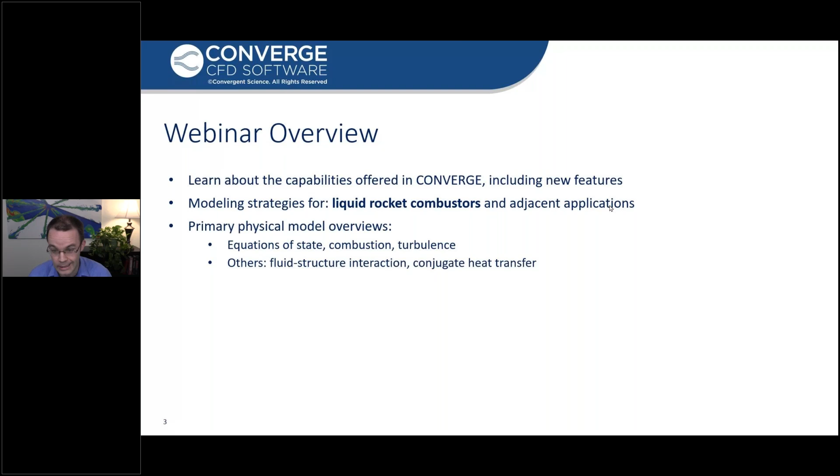In this approximately one hour webinar, we're going to talk about the capabilities offered by CONVERGE, specifically for the application aimed toward the end goal of modeling combustion in liquid rocket engines. We'll focus mostly on the effects of the equations of state, combustion, and turbulence, as well as highlighting the unique features offered by CONVERGE which make it a great fit for these challenging problems. Toward the end, we'll give a brief workflow demonstration of a multi-element combustor and show what's involved with a practical case setup, so you can get some idea of what it involves to use yourself. Then at the very end, we'll touch on a couple other related application areas briefly, but the bulk of the webinar will involve this end goal of what does it take to model liquid rocket combustors.

As a very brief intro for anybody who's not familiar, we'll go over the basics of a rocket engine so we can frame our discussion. In a rocket engine, the fuel and the oxidizer are stored entirely on board, so it carries with it all of the propellants. The fuel and oxidizer are then mixed and burned in a combustion chamber, and those combustion products are accelerated out through the nozzle to produce the thrust.

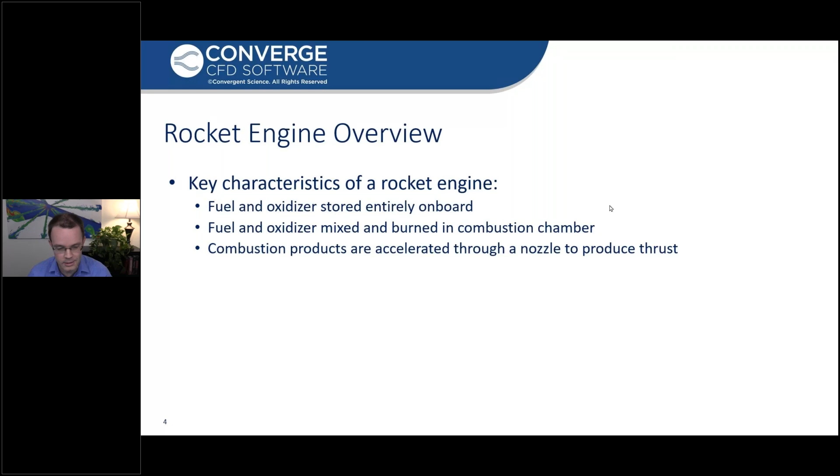That's the very basic purpose, and there's a basic classification of these rocket engines into two broad categories: the solid type of combustors, in which the fuel and oxidizer are in a premixed binder grain which is then burned, in contrast to a liquid rocket, which is the subject of today's discussion, where the fuel and the oxidizer are stored in liquid form and then pumped and injected into the combustion chamber, where they are subsequently mixed and burned.

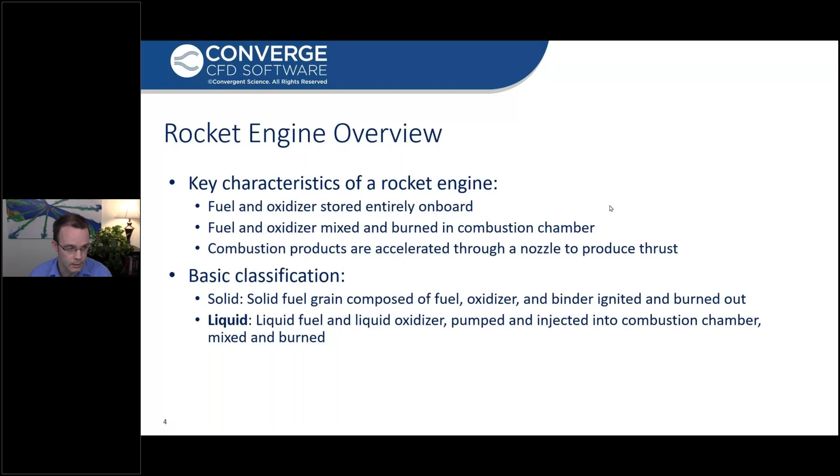Now, the key flow processes in rocket engines for which computational fluid dynamics analysis is useful include a variety of real problems, including the safe storage of the fuel and the oxidizer, the flow of the fuel and the oxidizer through all of the components, and then the ignition, combustion control, stabilization, and maximization of combustion efficiency, which is one of the main points we'll be looking at in this webinar.

For solid and hybrid type rockets, there's additional complexity involving the grain shape. For liquid rocket types, the fuel and oxidizer composition, flow rate, and all of the upstream flow dynamics are very important when considering the fluid dynamics type of modeling. And then lastly, although it's not a main objective of this particular webinar, of particular interest in the practical design are issues related to heat transfer, cooling of components, as well as nozzle flow.

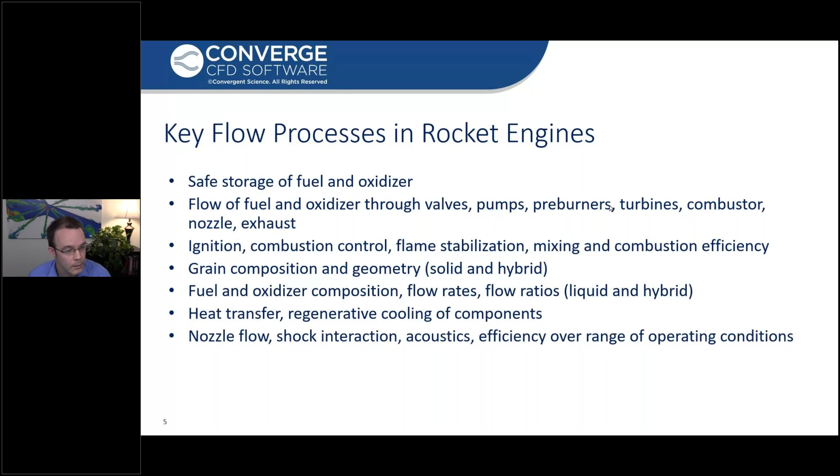To frame our discussion and the kind of environment we're going to be looking at in this webinar, I'd like to give everybody a sense of appreciation for how extreme the environment inside a liquid rocket combustor would be.

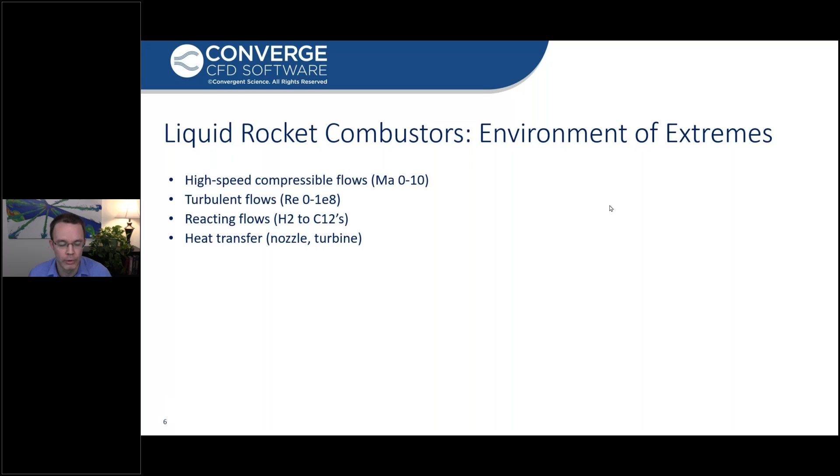These flows typically involve very high speeds at some point or another, with a large range in possible Mach numbers, as well as highly turbulent flows characterizing at least part of the domain with a very large range in Reynolds numbers. In terms of the reacting flows, the fuel and oxidizer combinations could involve tens to hundreds of species. A large range in heat transfer can be encountered in these environments.

But most importantly, and the major focus of today's discussion, is the wide range of the phase space accessed in this type of environment. We'll start on the injection side, where the fuel and/or oxidizer may be in the form of very low temperature cryogens, anywhere between 20 to 100 Kelvin, whereas the products of combustion can yield extremely high temperatures, characteristic of combustion or equilibrium compositions. Looking at the pressure, we have a similarly extreme range, going from near vacuum at the exhaust to extremely high pressures near the injection and in the combustion chamber itself.

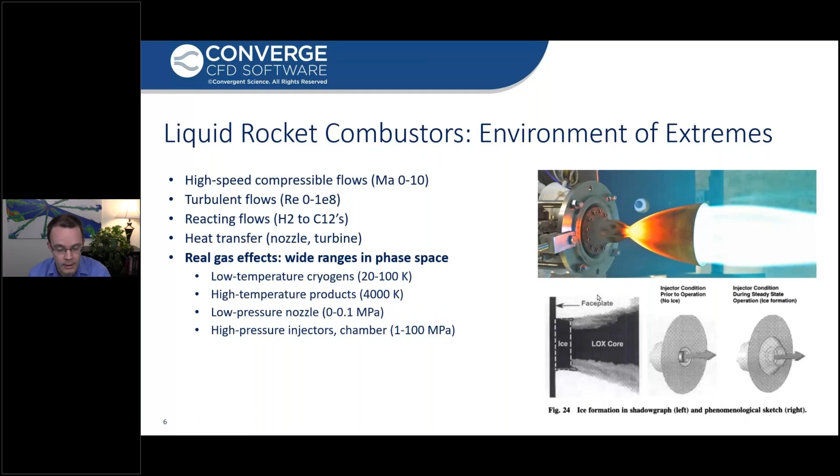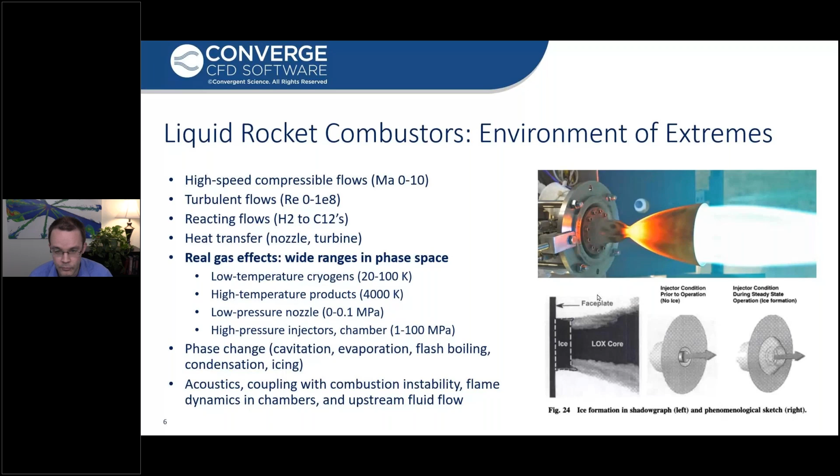So a really interesting contrast is to take a look at the extreme temperatures we have at the throat or within the combustion chamber, in contrast to the temperatures near the injection site, which are so low that ice may form. This is very characteristic of the type of problem where we want to demonstrate our different solution approaches, and help users understand what kind of advantages Converge can offer for these extreme environments.

Now we have a very brief value statement on why Converge is a great fit for these applications. Although Converge has a large number of amazing features, three are really highlighted in this application area. The first is no user meshing—the ability to bring in any geometry of arbitrary complexity and have it easily run through a flow analysis, which is extremely useful when the practical devices we're dealing with often involve very complex geometries that are strongly related to the dynamics of the flow.

Secondly, the automated and adaptive meshing approach is key for modeling these cases with enough accuracy to resolve all the important length and time scales, but enough efficiency so you're not wasting cost where it doesn't impact your end outputs as much. This is one of the unique features offered by Converge, and extremely advantageous for environments with very large gradients through space and large variations in time.

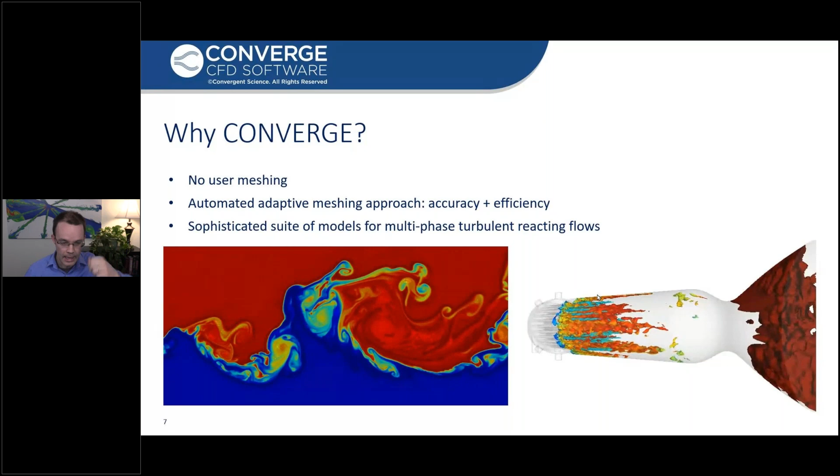Converge will take care of all of this for you with a really accurate and efficient mesh, which is easy to set up. Lastly, and what will be the focus of most of our talk today, is the sophisticated suite of models offered by Converge, relevant to this broad category of multi-phase turbulent reacting flows—that's what we're going to be discussing mostly today.

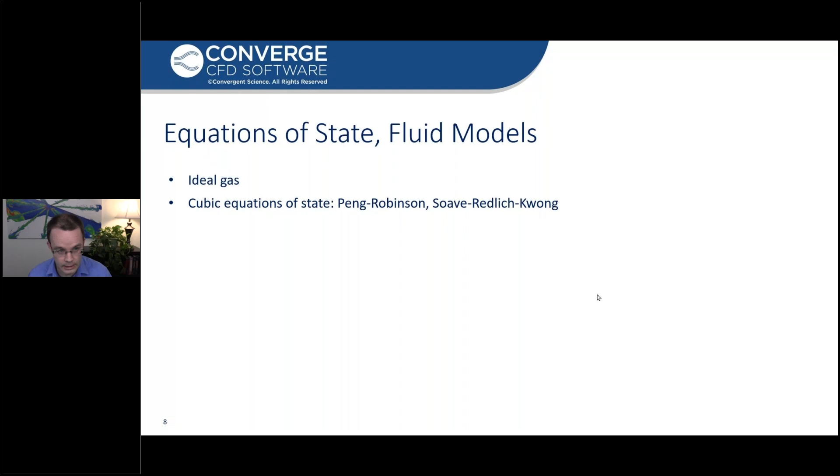A brief overview of what type of equations of state or other fluid models are offered by Converge is what we'll go over next. At the very basic level, we do offer ideal gas equations of state, which for some combustion models or combustors could be a very efficient approach. It's by far the least expensive, and with temperatures as high as they are, especially for lower pressures, ideal gas may be a good solution for some practical combustors.

On the other hand, the next level of complexity offered by Converge is in the category of cubic equations of state—for example, the Peng-Robinson or Soave-Redlich-Kwong equations of state. An alternate option offered by Converge is the tabulated equation of state, which has three flavors: one being the single-component tabulated equation of state, a fairly simple two-dimensional table generated in a pre-processing step, so you don't need to worry about how expensive the equation of state is to evaluate. Then there are two additional options for cases involving multiple components and mixing—one using ideal mixing rules, and another including an additional tabulated dimension to account for more accurate mixing properties. We'll talk about these options later in the slide.

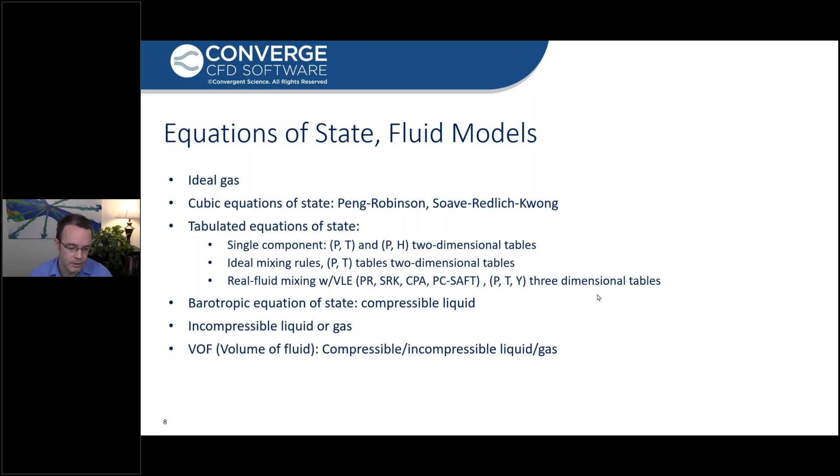As far as modeling multiphase flows goes, in addition to the detailed equations of state, Converge offers volume of fluid approaches, which can be coupled with compressible or incompressible models of the fluid. Lastly, there's a wide suite of Lagrangian spray models offered by Converge, the most complicated of which can be coupled with your continuous phase model through ELSA.

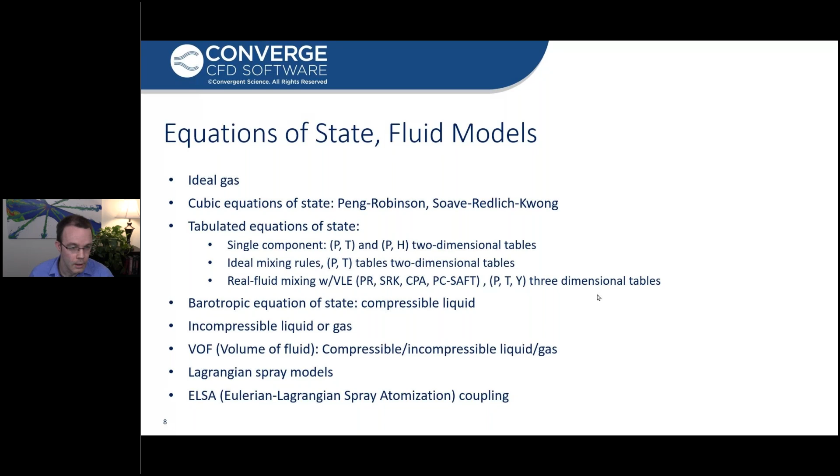CONVERGE also offers a very wide range of combustion models, although the main focus of this talk is going to highlight detailed chemistry, which we call SAGE. This is a great model because it's applicable across all modes of combustion. It's very accurate and easy for users to set up, and with our adaptive zoning, it's actually pretty affordable too.

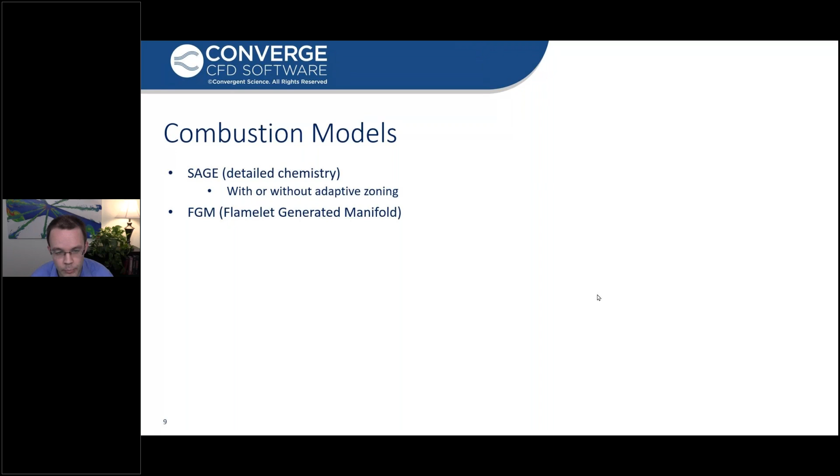On the other hand, we do have a wide variety of simplified models which are applicable to select modes of combustion, including FGM and RIF for flamelet-based non-premixed combustion models, ECFM3Z, applicable to some premixed and non-premixed cases, as well as eddy dissipation model for mixing timescale type of problems, and G equation primarily for premixed combustion problems. There's also a suite of submodels applicable to most of these combustion models, including models for NOx, which may be important for modeling practical combustors.

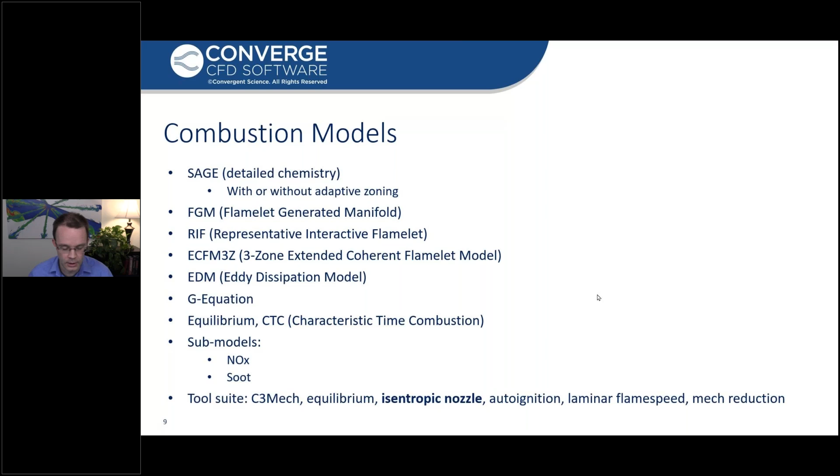In addition to all of these CFD combustion models, CONVERGE also offers a variety of tools for simplified combustion analyses, one of which is the isentropic nozzle calculator, which is really useful for these applications in order to get a good initial condition.

In the category of turbulence models, CONVERGE offers three main types, first of which is RANS, Reynolds Average Navier-Stokes equations, and there's a wide variety of those models offered here.

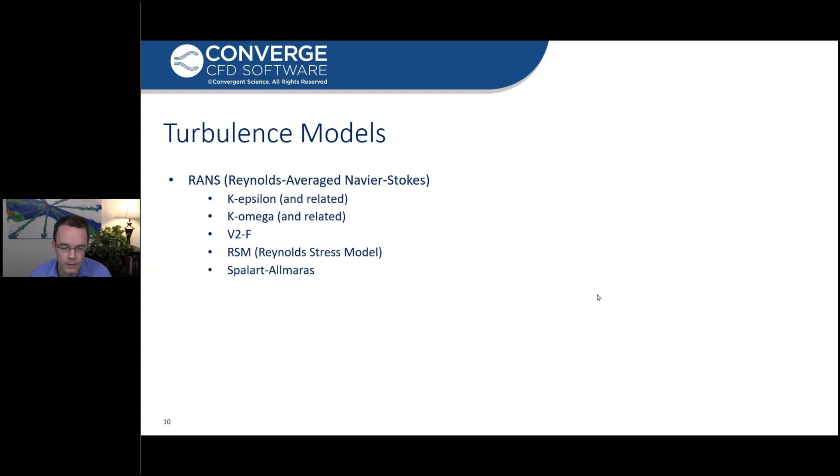The large eddy simulation is a great offering by CONVERGE, which is particularly useful for these combustion analyses where we're looking at unsteady effects and instability prediction. And then finally, the detached eddy simulation offers a combination of the RANS model for accuracy near the wall and large eddy simulation in the far field.

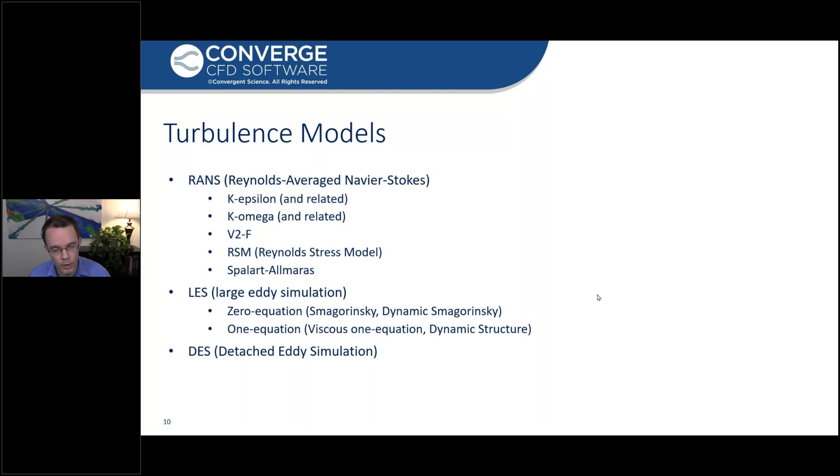So all of these models are offered by CONVERGE, and we'll demonstrate mostly the large eddy simulation and some RANS models in the context of the combustors that we'll look at.

Now, while the main end goal of the benchmarks that we'll show today are aimed toward modeling liquid rocket combustion, in this webinar we're going to take you step by step through three layers of complexity, all of which are prerequisites to being able to model multi-species, turbulent combustion problems across a wide range of phase space.

So we're going to go through in this webinar, this slide kind of highlights the main overview of what we're going to be looking at, a progression of demonstration cases starting from the simplest and moving toward the complex. In the very first one, we'll demonstrate the use of CONVERGE for modeling supercritical flows of single components.

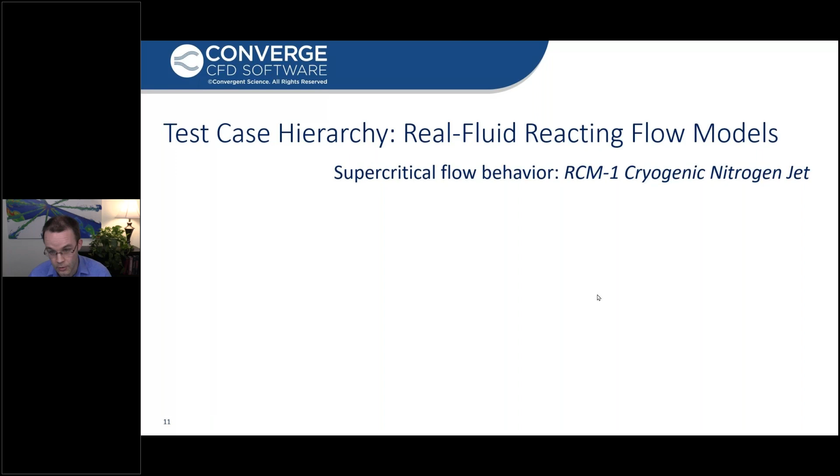After that, we'll go to our next layer of complexity where we talk about mixing dynamics at supercritical conditions for more than one component.

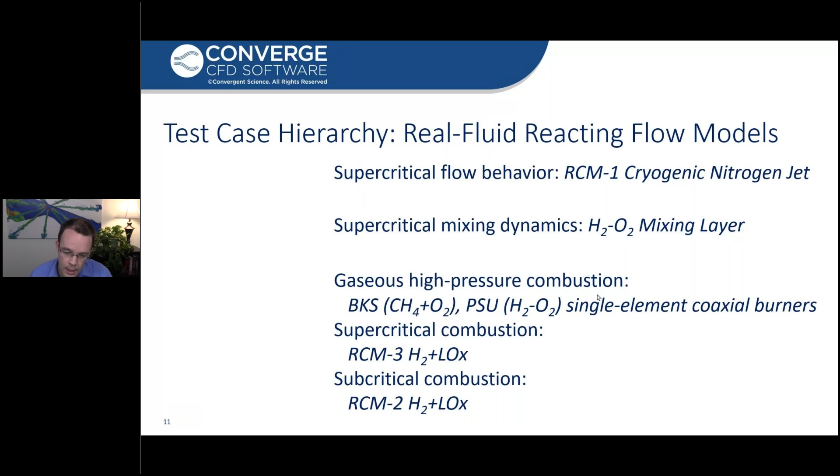And finally, after we've demonstrated the features and the model setups necessary to do these previous two problems, we'll talk about adding combustion into the mix, first with ideal gas type conditions or conditions that don't involve such low temperatures, and then talk about the supercritical and subcritical combustion type of models available through CONVERGE.

So just about all of these cases involve super or subcritical flows, so we have a wide range in the accessed phase space. The last four all involve mixing, and the final three involve combustion. So this is our progression, and this is kind of the roadmap for this webinar, showing what steps we'll take to reach this end goal of modeling multi-phase, multi-component reacting mixtures with CONVERGE.

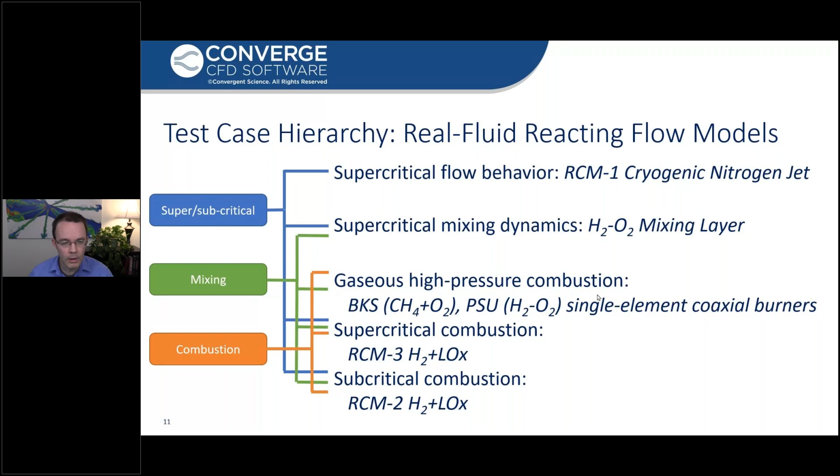All right, and we'll get started with that right away by looking at our very first category of cases, the simplest ones that we'll look at today, where we look at the use of CONVERGE in modeling supercritical flow and subcritical flow of single components.

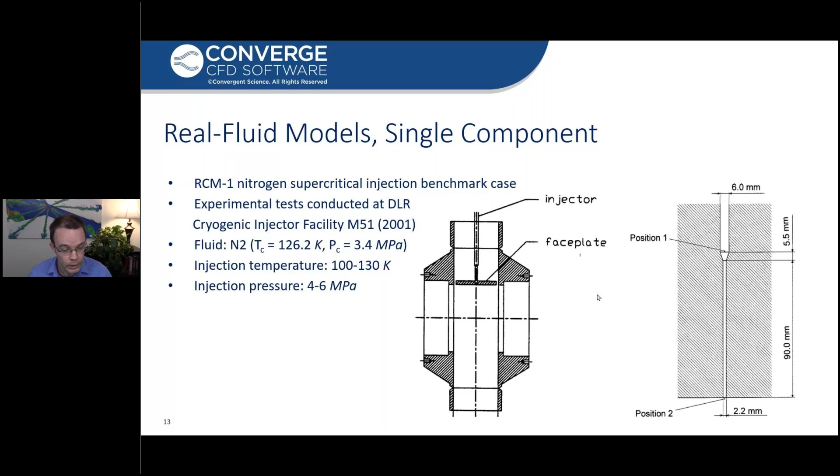There's a variety of test cases that we use to assess CONVERGE's capabilities in this area, one of them being the well-studied RCM1 cryogenic nitrogen injection case. This case involves a single cylindrical injection of low temperature nitrogen, and it's particularly designed to mimic conditions encountered in liquid rocket combustors. The environment pressure that's being injected into ranges between 4 to 6 megapascal, which is just over the critical pressure of the nitrogen.

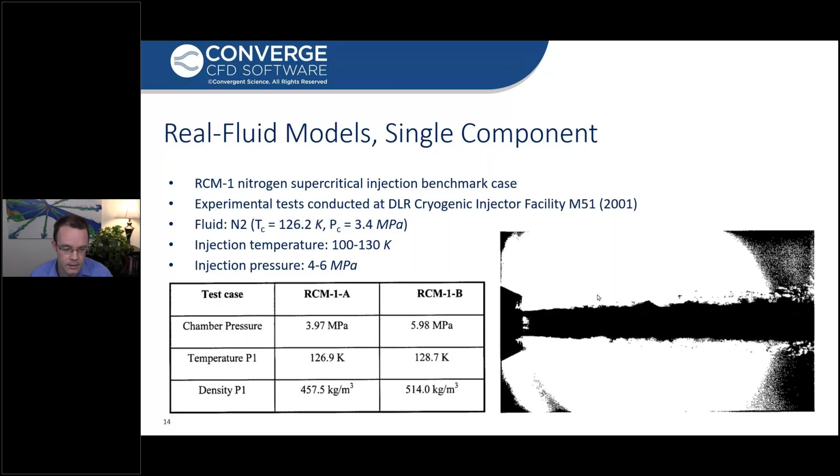Similarly, a lot of the thermodynamic variables have very strong change throughout the conditions encountered in this relatively simple test case. There are two primary approaches applicable in CONVERGE for this type of problem. The first being the analytical cubic equations of state.

In this particular model, something new added for CONVERGE 4 is the Chung correlation for the transport properties. We also offer a constant pressure tabulation, which can be used to specify the transport properties at a particular pressure or over a range of pressures. It's important to note that with this model, we still do require discrete tables for the departure functions.

One of the new capabilities offered by CONVERGE 4.0 is the ability for users to have fine-grained control over those resolutions so that we can get them fine enough to resolve these kinds of changes encountered throughout the conditions.

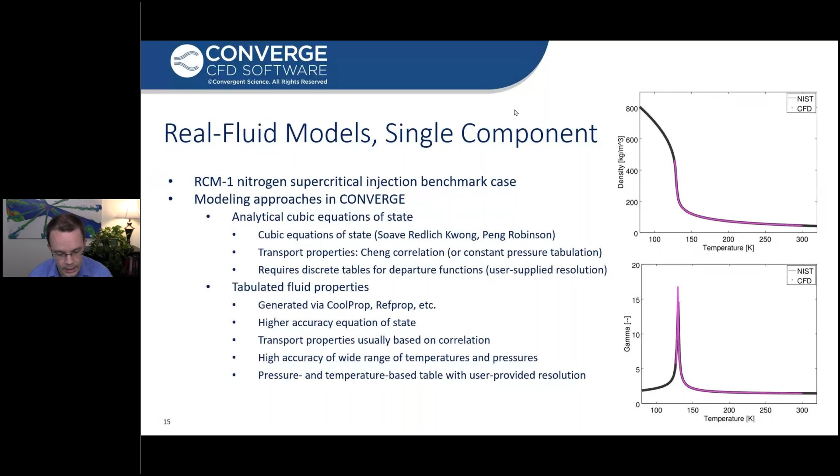Now, the second possible approach in CONVERGE is to use the tabulated fluid properties approach. In this approach, we generate a table ahead of time through another tool, for example the open source utility CoolProp, where we can use a higher accuracy equation of state and also retrieve the transport properties as well as the thermodynamic properties for these highly accurate and validated equations of state. Both of these approaches are available in CONVERGE.

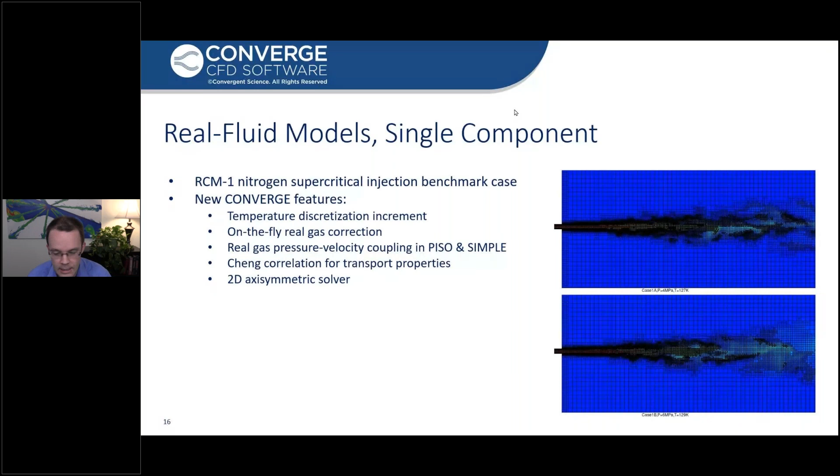One of the main capabilities offered by CONVERGE 4.0 is the real gas pressure velocity coupling. In this approach, we use the derivative expressions from the actual equations of state to solve our transport equations within each time step. This allows us to simulate over a wide range of changes in our density and thermal properties, no matter how they deviate from the ideal gas properties.

So like I mentioned, in addition to the RCM1 case, we have validated against a number of cases. When looking at the actual data for comparison, there's always some uncertainty due to the unknown actual temperature around injection. So while we do demonstrate results that look very similar to what's measured, that's not really the main point of this demonstration. The main point is rather that the solver runs robustly through this extreme range of conditions, including one of the cases from the AFRL injection case, which is slightly different from the RCM1 case.

In this case, it's even more challenging because the pressure is lower than what's encountered in the RCM1 case. So instead of 4 megapascal, the lowest pressure is about 3.5 megapascal, which is much closer to the critical pressure of the nitrogen. As you go lower and lower in pressure, the variation in the properties becomes larger and larger towards the critical point, and it's a better and better test case for the solver's robustness.

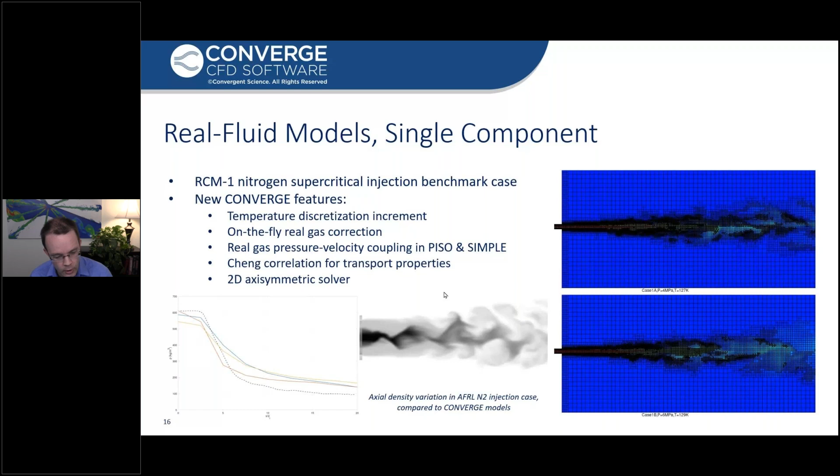So we've demonstrated the robust functionality of CONVERGE 4.0 across this very wide range in conditions.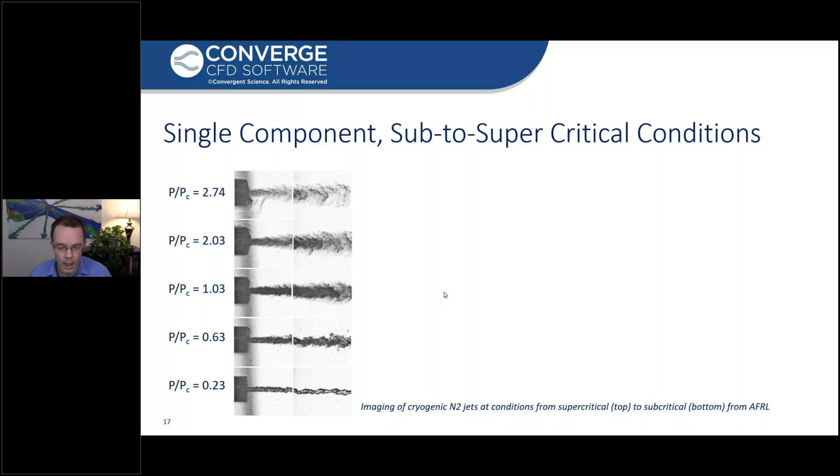Next you may be asking what happens as the pressure gets even lower than that. As the pressure reduces to beyond the critical pressure of that single component, we enter the subcritical regime where the injection dynamics could change significantly from the supercritical conditions.

For the subcritical injection, there are three primary options available with CONVERGE 4.0. The first being the volume of fluid method, which is pretty robustly tested out through a lot of different test cases. The disadvantage of the volume of fluid method is that the equation of state is somewhat simplified from the other approaches. In this case, we're limited to a compressible liquid model.

So we sacrifice some of the thermodynamic accuracy because of that. However, it's a relatively fast method, and a lot of times for your known conditions, it's quite a good approximation for that equation of state.

Now, the second approach is an enthalpy-based tabulated equation of state. With the enthalpy-based approach, instead of a pressure temperature table, we use a pressure enthalpy table. This has the advantage of being able to fully parameterize the phase space from subcritical to supercritical conditions, which gives us the option to include the two-phase region in the simulation.

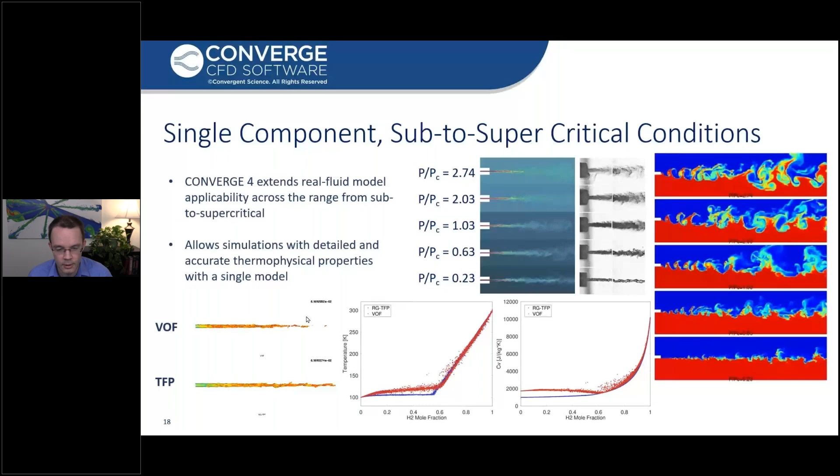So in terms of the model complexity and the cost, it's very similar, but as we'll discuss, each approach has certain advantages when we look at more complicated problems.

So here's another demonstration of the tabulated fluid properties versus the volume of fluid with a compressible liquid equation of state for a slightly different condition. This condition was chosen so that there's more error associated with the simplified equation of state for the VOF model.

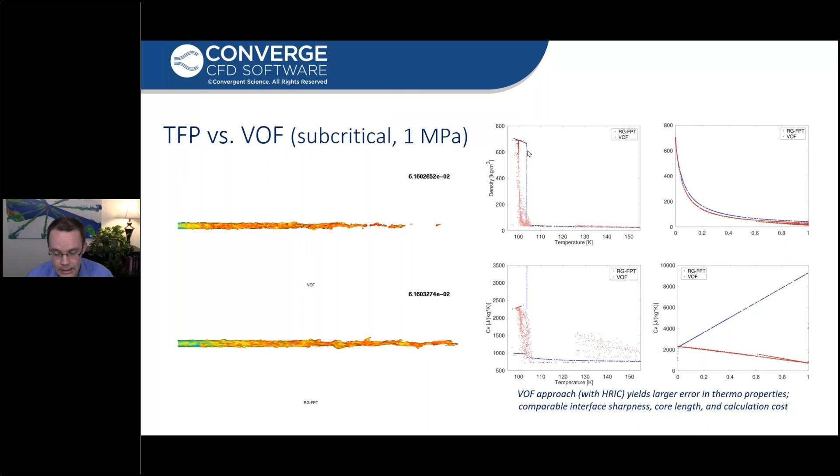In this demonstration, we showed the VOF model, in addition to the equation of state being different, has the ability to include the non-equilibrium effects in the phase change, which is why you see these density versus temperature profiles deviate, whereas the tabulated equation of state assumes equilibrium properties at all temperatures and pressures.

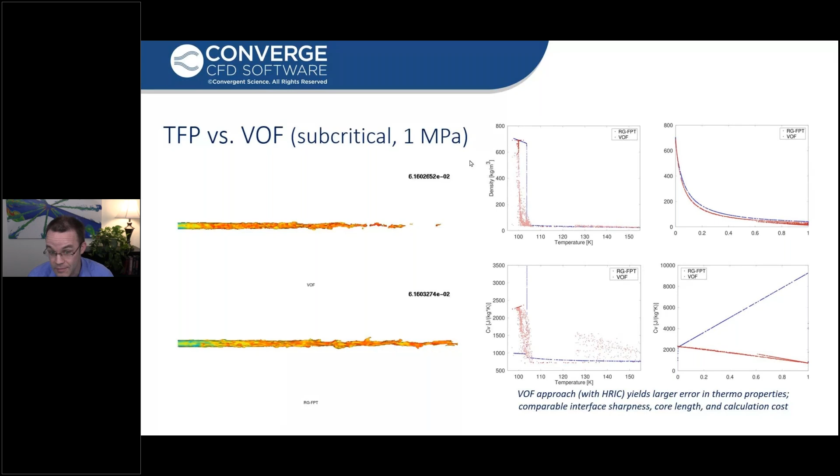The volume of fluid model does allow the timescale to affect the phase change rate, so you get some difference there. What we don't really know is which is more accurate: the non-equilibrium effects together with the simplified equation of state, or the more accurate equation of state with equilibrium phase change.

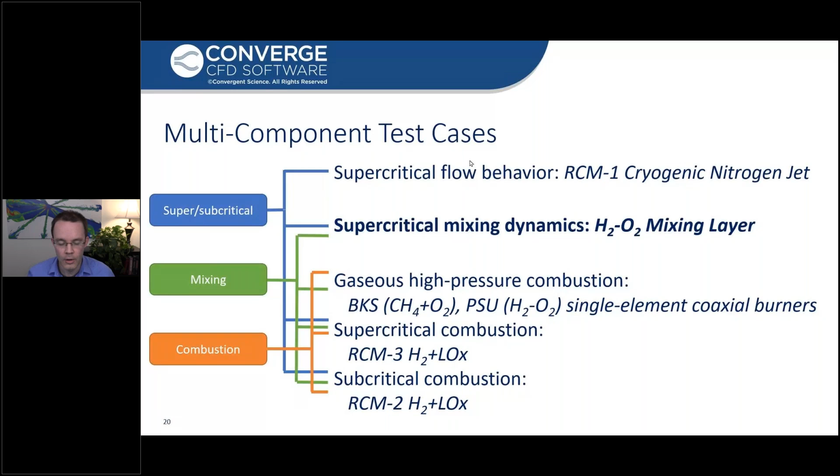Okay, so having looked at the single component test cases at both sub and supercritical conditions, we'll move on to the next layer of complexity, and this is in modeling the supercritical mixing dynamics. The main test case we'll use to demonstrate the features offered by CONVERGE is a hydrogen-oxygen mixing layer, although we will demonstrate the applicability in some other cases as well.

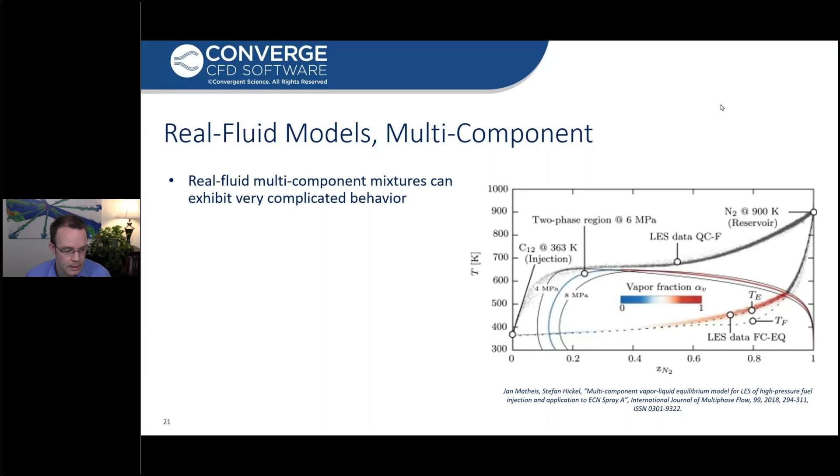And the very first thing I'd like to demonstrate, and hope that you get some appreciation for, is how complex the additional element of mixing can make the problem statement. So as soon as we introduce another component, we can have a possibly very wide range in properties and a very large deviation from the behavior of those single components.

In the case of a multi-component mixture, the thermodynamic state is parameterized by the pressure, the temperature, and the mass fractions. And the mixture properties, as this diagram from another work does a really great job to show, may be very different from the properties of the pure components.

For example, as shown in this picture, we have a mixture of dodecane and nitrogen, and although the pure components' critical points are exceeded in all of the pure stream conditions, the critical points of the mixture are extremely different, such that we get two-phase behavior in this type of mixture.

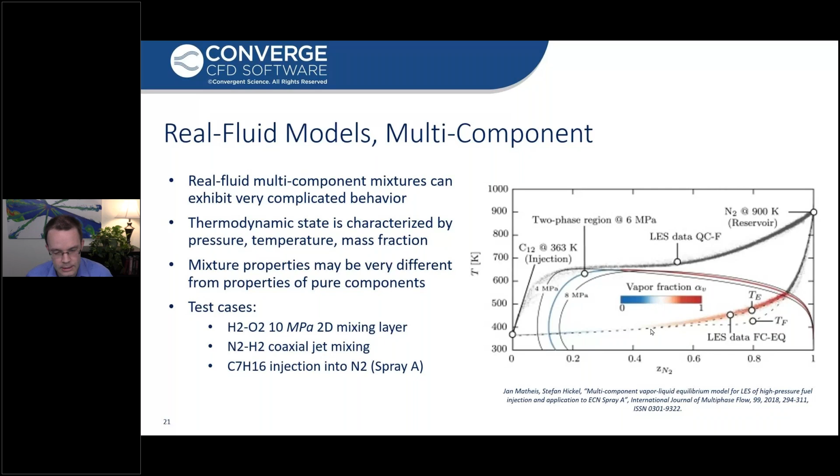And to demonstrate this, we'll use three different cases to show CONVERGE's different models applicable. The first being the 2D mixing layer of cryogenic oxygen and hydrogen. Then we'll also show a coaxial jet of nitrogen and hydrogen. And lastly, a diesel-like injection scenario modeled with the same approaches.

The first being the standard cubic equation of state, where we only look at the largest root, which is the common approach mostly used when the cubic equation of state is used. But that's contrasted to a more detailed approach, the same equation of state, but with a vapor-liquid equilibrium computed for all of the points which fall into the multiphase part of the phase space. This is demonstrated through the third option I mentioned for modeling mixing with a tabulated equation of state.

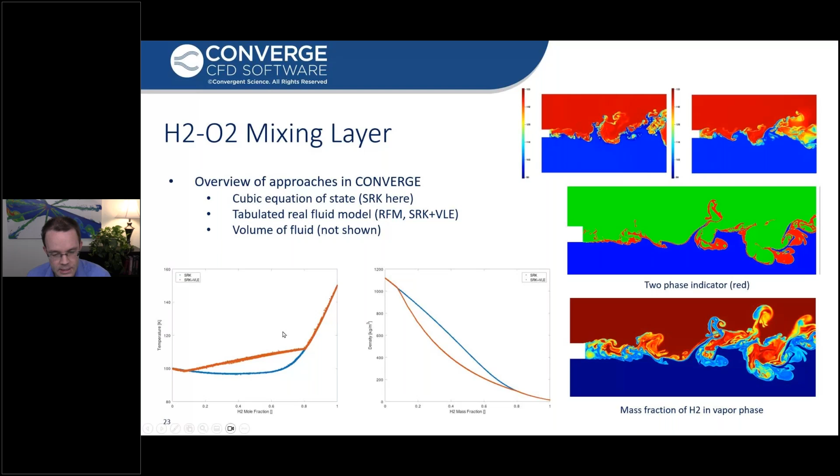complementary surface tension forces wherever the interface is present. Meanwhile, within each of the cells, the homogeneous approach is used, so any cell falling within the two-phase region has a homogeneous composition composed of the sum of the liquid and the vapor properties. This model also allows us to consider the differential effects of having component compositions change within the two-phase region, which is a capability that neither of these other approaches, the standard cubic equation of state or the volume of fluid approach, can offer. So for cases that are very sensitive to the mixture density and/or the mixture temperature, this is a really useful approach that is a great capability of CONVERGE 4.0.

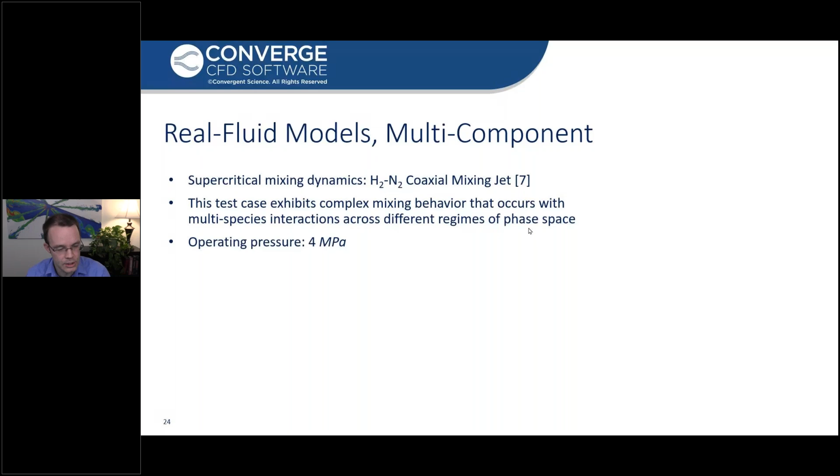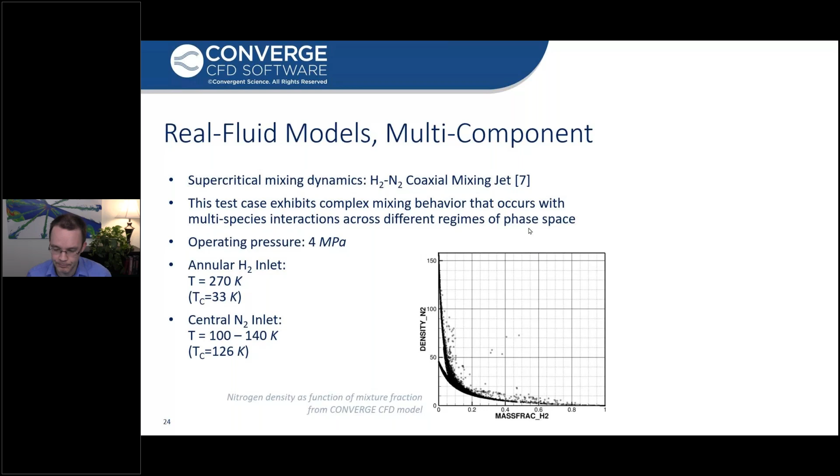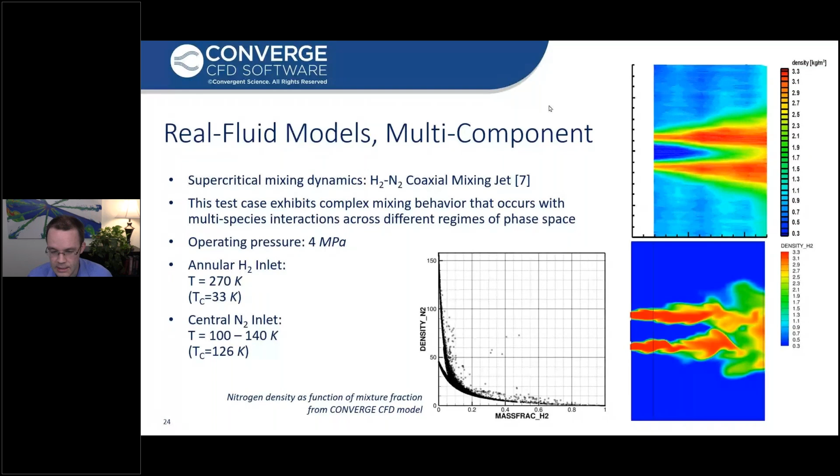A second test case to examine the multi-phase, multi-component mixing is the coaxial mixing jet of hydrogen and nitrogen, again at cryogenic conditions. There's an annular inlet of hydrogen which encloses a central inlet of cold nitrogen. These are injected into an environment slightly above the critical pressure of the nitrogen. In this case as well, we do get two-phase behavior, and the CONVERGE model is roughly compared to the density measured experimentally, but more importantly, showing the solver running robustly and with a thermodynamically consistent model across this wide range of the phase space.

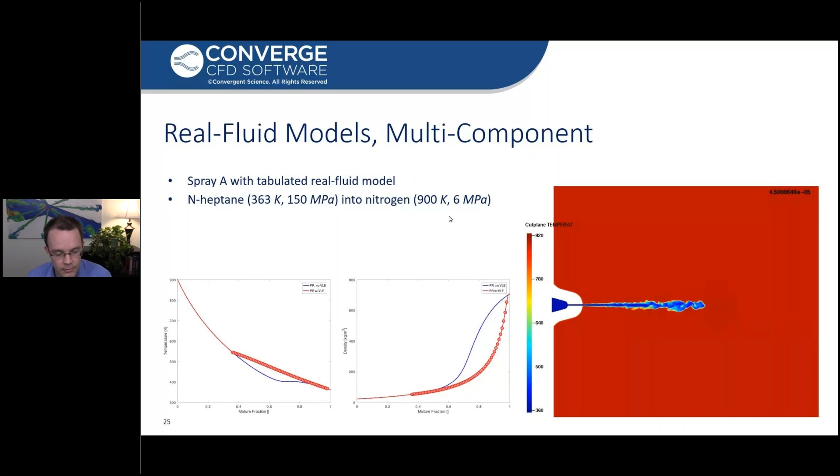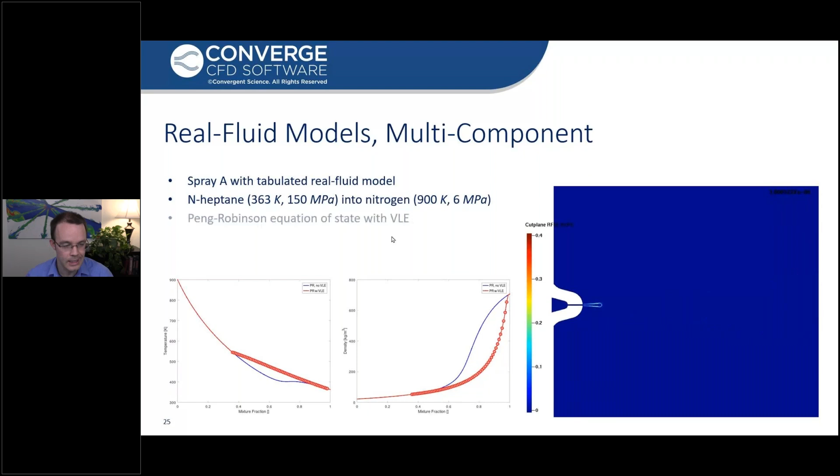Now, the last problem we'll demonstrate for the multi-phase, multi-component mixtures is a very different application, but with very similar conditions, namely the spray A conditions involving the injection of high pressure N-heptane into nitrogen. The purpose of doing this is to show that the conditions encountered within the liquid rocket combustors are similarly encountered in other applications, and the models being used here do a great job offering additional levels at which we can look at the model complexity.

So in this approach, we compared the standard Peng-Robinson equation of state with and without the vapor-liquid equilibrium calculation. You can see again here, by this plot showing the mixture temperature versus the mixture fraction, that we do have a considerable part of the mixing space occupying the two-phase region. This approach offered by CONVERGE, together with our collaborators at IFP, allows us to look in detail at that two-phase region and understand how the properties encountered there affect the end outputs that we're interested in.

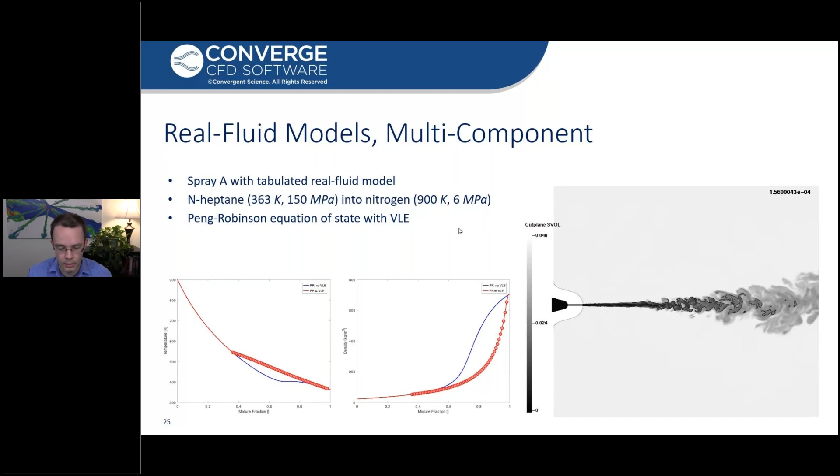If we compare the result here from two other simulations, we can see two main takeaways. One, that other simulations which consider the vapor liquid equilibrium part of the phase space give a really similar result in terms of the mixture temperature as a function of the mixture fraction, whereas models that don't consider this effect may have a much different scatter and phase space. In other words, the mixture temperature could be very different if the equation of state is different.

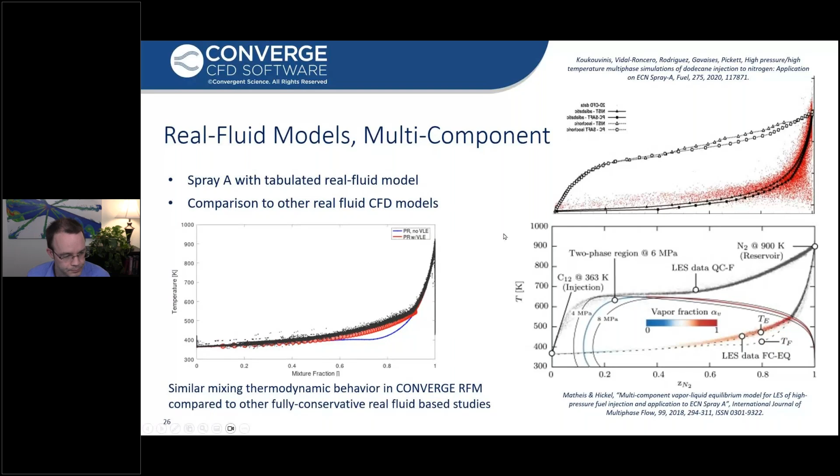Now, in addition to this, there are a couple other approaches offered by CONVERGE which can be really useful depending on your end goal. This demonstration shows the volume of fluid approach applied to a very similar problem. With this approach, although we've sacrificed some of the accuracy of the equation of state, if the end outputs we're interested in don't depend too much on that — for example, if we're more concerned about the acoustic propagation throughout the domain — then the volume of fluid approach offers a very computationally efficient and robust method for looking at those types of conditions.

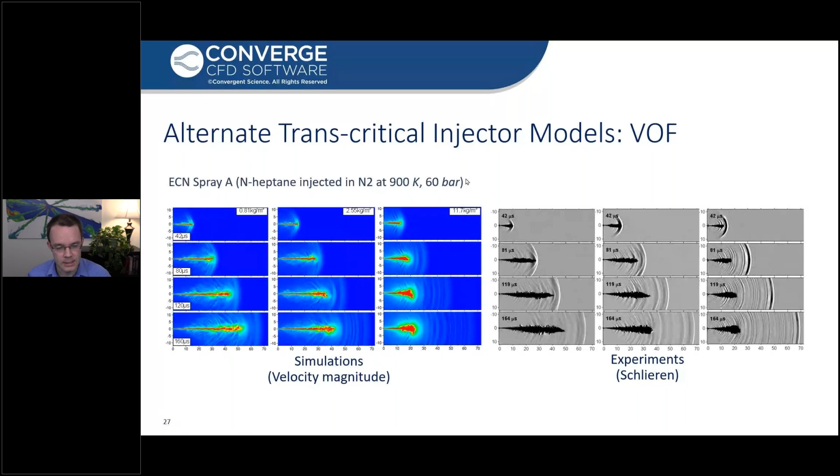On the other hand, incompressible models are also available in CONVERGE if users are more interested in looking for, especially for subcritical injection, the interface that occurs between the two phases. With the incompressible approach, we can get a much higher accuracy prediction of the interface, although again, here we've sacrificed even more of the equation of state by using an incompressible model.

So depending on the purpose of your studies and the conditions that you're working at, any of these three models may be of more interest to you.

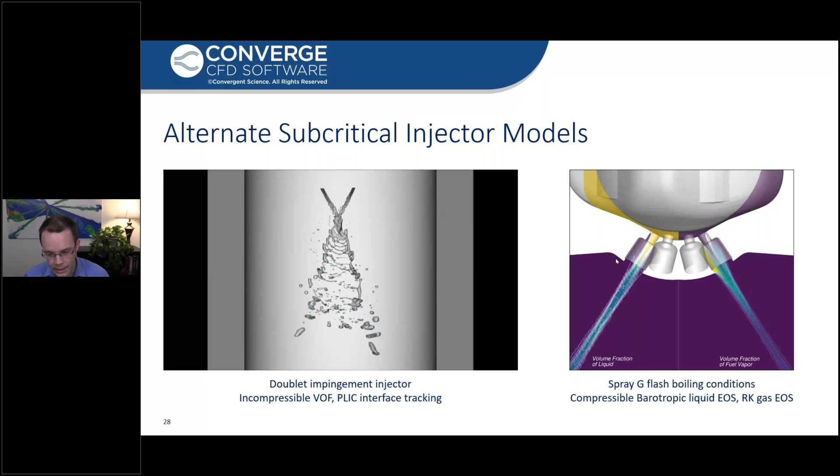On the other hand, if phase change is of high importance in your case, the volume of fluid method, as shown in this gasoline injection case, offers a lot of advantages in terms of being able to predict the non-equilibrium phase change in a very similar way to what we showed in the single component cases.

Okay, so now that we've looked at both the pure component behavior at sub and supercritical conditions, as well as the mixture behavior, we're ready to throw in the next layer of complexity into our models, that being the reaction element. So the next three types of cases we'll look at will involve the gaseous conditions, the supercritical conditions, and lastly, the subcritical conditions.

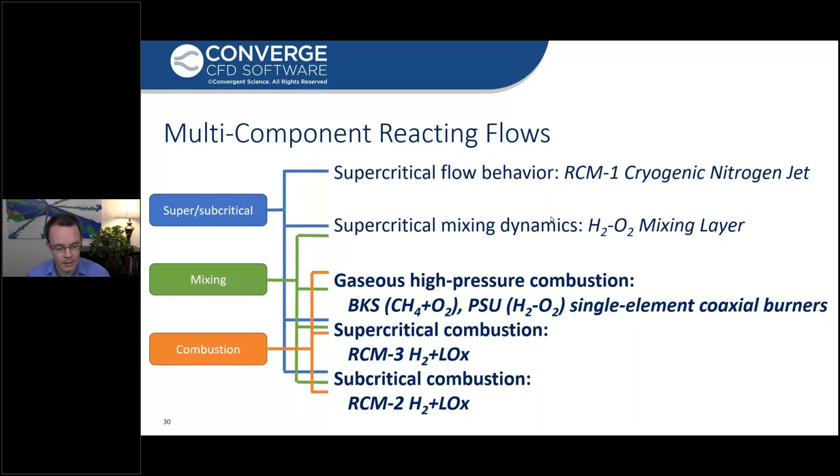This case shown over here is the Penn State combustor. Although it's at a high pressure of 5 megapascal, the real gas effects aren't as important here because the injected quantities are coming off a pre-burner. So they're elevated in temperature. They're not at the cryogenic type of state that we have in the other problems.

And in this problem, the main objective that we'd like to show is how to set up CONVERGE's mesh strategy and how to get a complicated case like this up to steady state in a reasonable amount of time.

In this case, we also have the complexity that the chamber pressure is a function of the flow through the nozzle. So we don't impose the chamber pressure, rather it's predicted by a combination of the flow properties at the exit as well as the overall combustion efficiency.

So the process we use is a three-step process involving a calculation without the nozzle and an imposed pressure based on equilibrium combustion. From that, we map that to a coarse grid using CONVERGE's mapping feature. And after that, we activate AMR to get a higher accuracy solution once all of those have reached a steady enough state. And with this kind of approach, we solve all of the other combustion-related problems that we'll show over here.

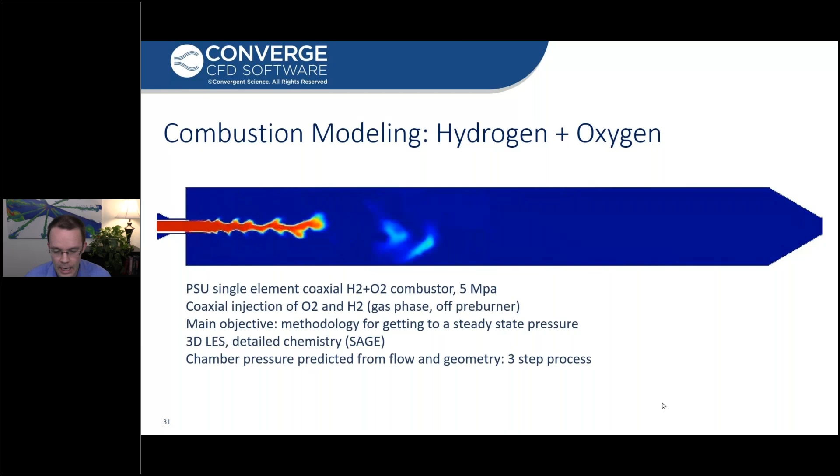So the main purpose of this case isn't so much to demonstrate the accuracy, although the chamber pressure reached is approximately that 5 megapascal, which is measured, but rather it's to show the approach in getting these complicated cases up to steady state in a reasonable amount of time.

Now, from this gaseous hydrogen case, we'll look at an additional layer of complexity, which is making the fuel composition more complicated. So we'll look at a methane oxygen case at a slightly lower pressure of 20 bar, but again with higher temperature inlets so that we don't have the complexity of the cold temperatures that we'll have in the next cases.

And the purpose of this test case is to show the advantages and disadvantages of the different combustion models offered by CONVERGE. And this is a great test case because unlike a lot of the others, it has a pretty large amount of optical data, important in understanding where the flame is located.

So like this picture shows on the bottom right, the OH concentration, which is a general indicator of where the flame is located, with the flamelet generated manifold solution, which is shown in the very bottom right. We get flames that are anchored closer to the post tip, whereas with SAGE, we get more of a lifted flame, which is also a function of the grid resolution around this part of the flow.

And it can be something that we can validate to the experimental data. So if we look to see where the flame is actually anchored according to the time averaged images, we get something that's kind of in between what we get from SAGE and FGM.

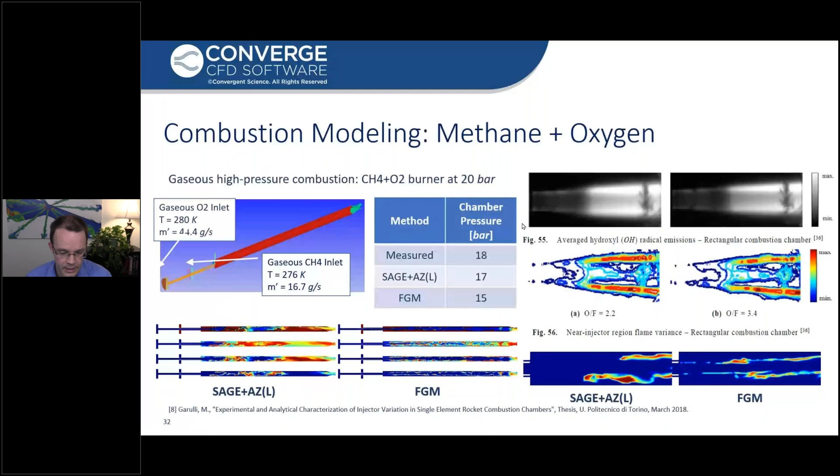And then a very similar approach has been used by one of our university collaborators at North Carolina State University, where they performed a similar analysis, but on a challenging flow configuration that involved the prediction of the acoustics within the chamber. And very interestingly, the compressibility from the model, as well as the interaction with the reaction rate, predicted a very good match in the internal acoustics of the combustion chamber.

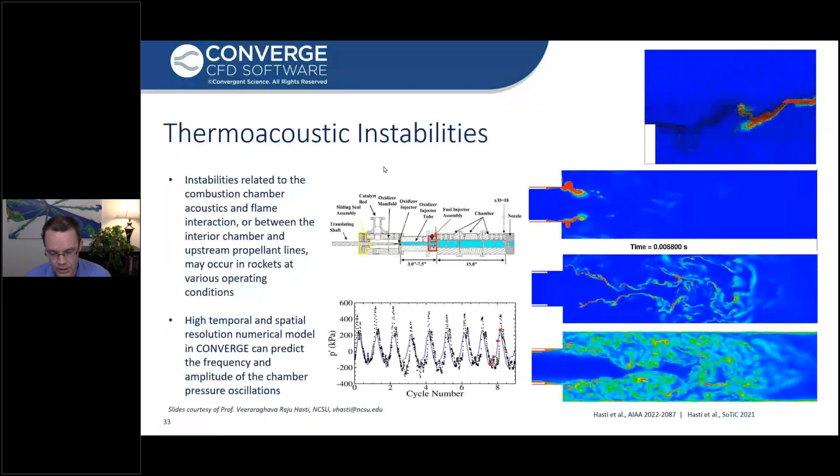So it's an application of a similar approach that was shown in the test case before, but for a test case that has more variation in pressure throughout the chamber and could be experimentally validated.

Now, the next layer of complexity to further add to these cases is the supercritical conditions where the fuel or the oxidizer come in at a low temperature. In these cases, we need to be a lot more conscious of our equation of state and other fluid models used in the study.

In this demonstration of the RCM3 case, where we have a chamber pressure of about 6 MPa and an oxygen injection temperature of around 85 Kelvin, we need to be much more accurate in our thermodynamics as well as our transport properties so that we have the right properties of our fuel coming in. The major thing to look at is the prediction of both the core length of our oxygen, which is in the center, as well as the flame shape.

For this particular test case, we looked at a couple different scenarios. The first ones, compared to another work, are done with CONVERGE's new two-dimensional axisymmetric solver for both a lower flow rate of hydrogen on the bottom, the C60 case, and a higher flow rate of hydrogen on top, the A60 case, contrasted to a full three-dimensional LES simulation of this particular case, shown on the bottom.

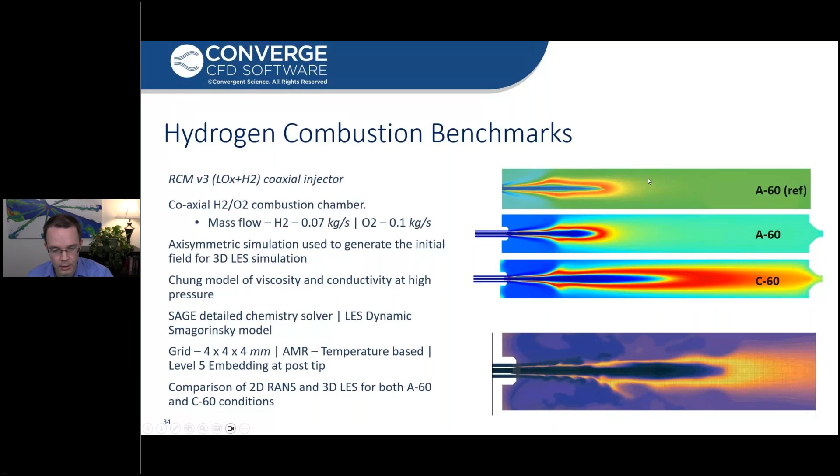So the 2D solution was used to initialize the full 3D case. Again, in all of these cases, the same approach used in that first combustion benchmark we showed was used to get the simulations up to a stable burning state in a relatively small amount of user time.

An additional case that can be contrasted to the RCM3 case is the NASA single element injection case. The nice thing about this one is twofold: first, that it looks at a wide range in the chamber pressure, spanning sub to supercritical conditions, as well as the fact that the chamber is relatively small.

So the flow through time is small, and it allows a modeler to quickly assess the ability of the model to yield a stable burning flame within a combustor that includes the throat and all of the potentially high velocity at the exit of the throat. Unlike the RCM3 cases, this simulation was used with the actual nozzle in there so that the chamber pressure could be predicted from the model itself.

In this case, we compared and contrasted a variety of approaches for the equation of state. The first, shown with the blue line, is the chamber pressure from the ideal gas equation of state. The following lines, in the lighter blue through orange, are all with more complex equations of state, including the orange line, which is the tabulated fluid properties approach for the multi-component mixtures, a new capability in 4.0 to be coupled with combustion.

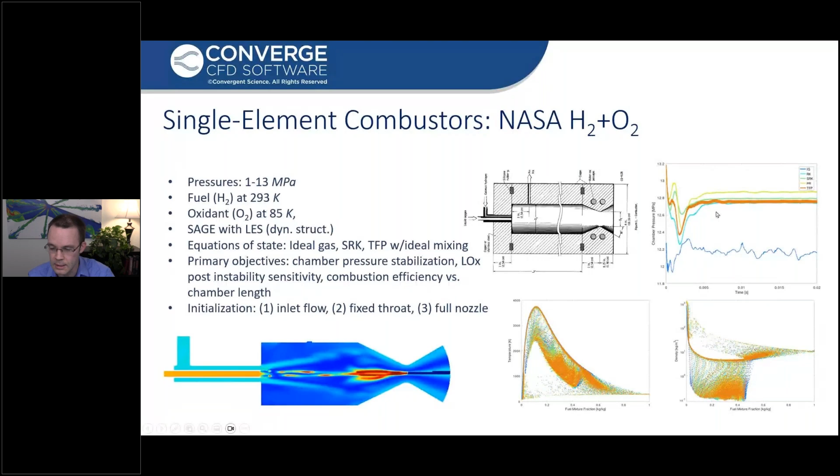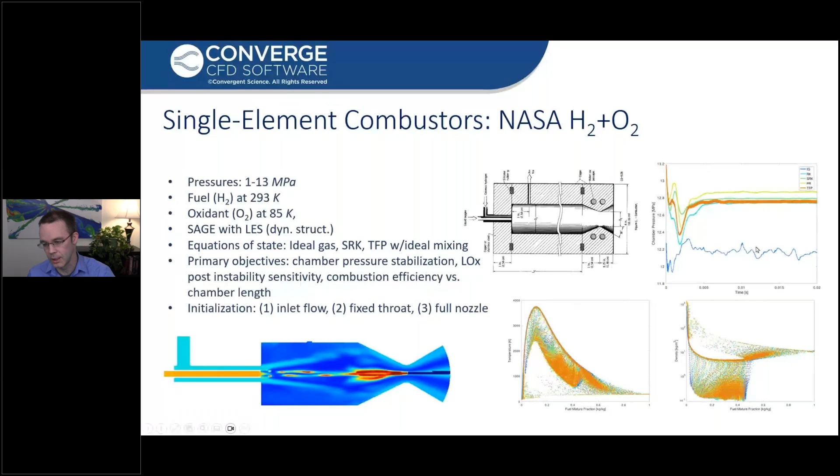In terms of the bulk comparison, the behavior of all the models is very similar, with the exception of the ideal gas model, which over-predicted the core length, over-predicted the flame length, and under-predicted the combustion efficiency. But for all of the non-ideal gas models, the behavior is similar.

As we go to lower and lower pressures, we'll enter the subcritical regime for the injected components, and the RCM2 benchmark at 10 bar is a slightly more challenging case than the RCM3 case because of that lower pressure and because of the effects of that lower pressure on the injection characteristics.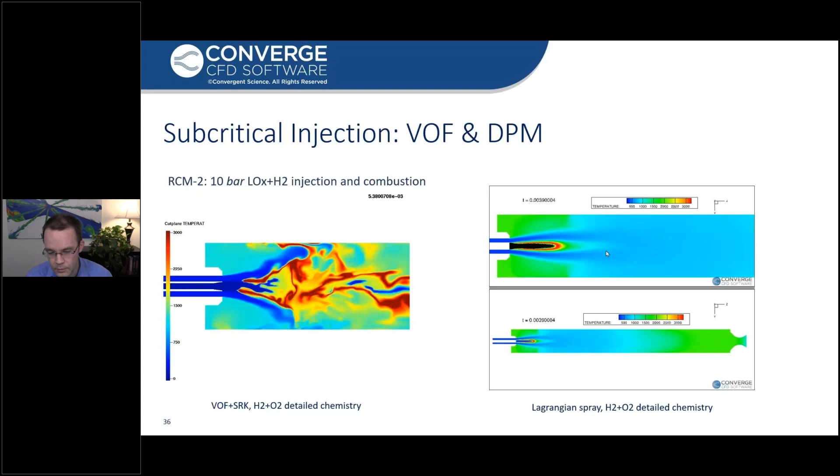In this video on the bottom left, we demonstrate the volume of fluid approach together with the Soave-Redlich-Kwong cubic equation of state in the gas phase. We compare and contrast that to a pure Lagrangian approach where the oxygen inlet is treated with a model similar to what would be used for an atomizing spray injection.

The very interesting thing about this comparison is that both models yield a similar averaged flame shape for the conditions, but we did find that the volume of fluid model allowed us to run with slightly more efficiency. These run times were slightly faster, and there was some difference about how the flame was anchored in both of the cases.

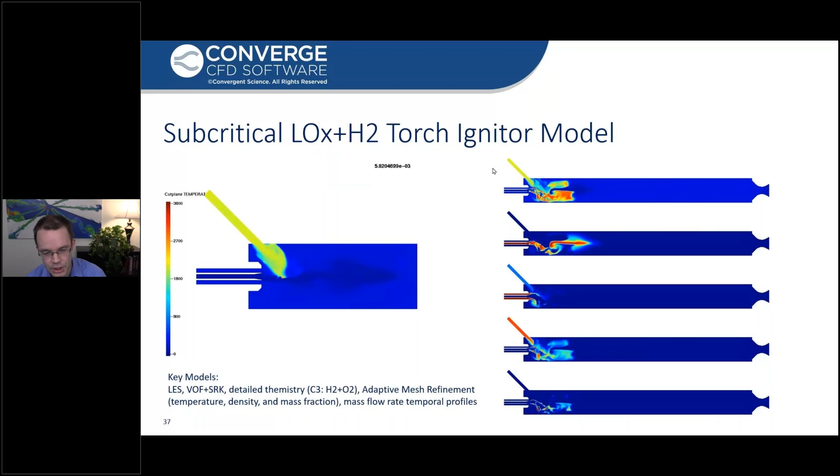One of the great things about CONVERGE is that the model variation with time is very easy to include. For these type of injection conditions, the flame is often initialized through a torch igniter or other similar injection method.

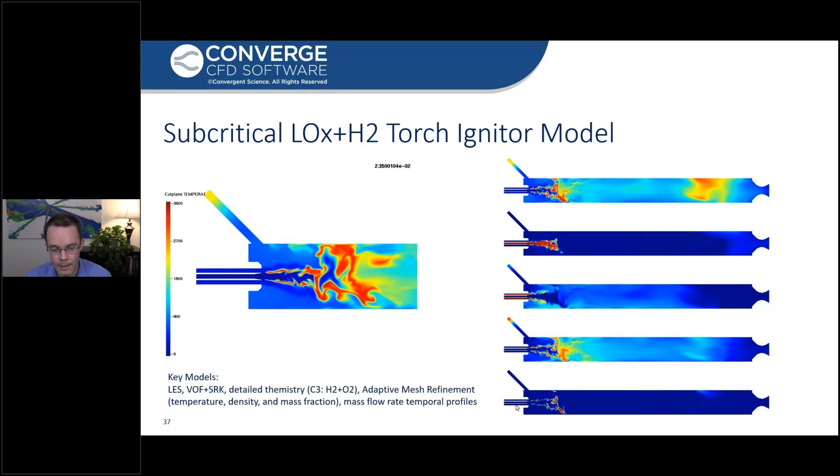In the RCM2 case, we demonstrated how a user could set up a torch ignition model and leverage CONVERGE's adaptive mesh refinement and the same equations of state with a time-accurate model. The main advantage is that because the flow behavior changes so much in both time and space, adaptive mesh refinement is really critical for a robust, efficient solution methodology.

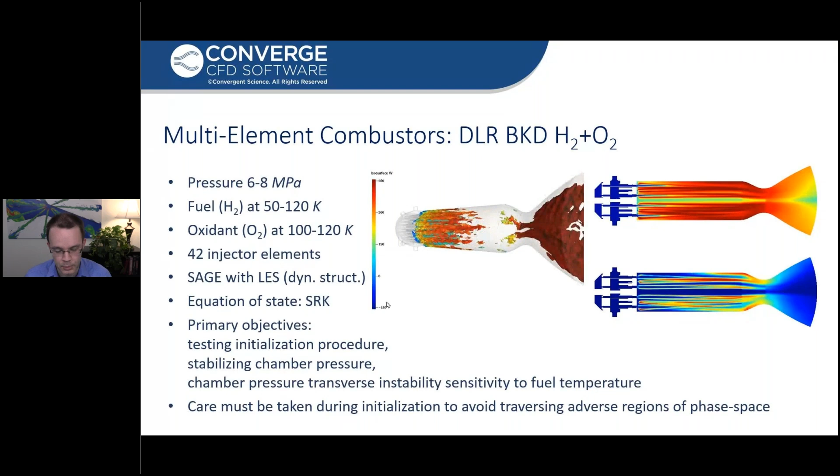The last test case we'll show is the multi-element combustor of the BKD case studied at DLR. In terms of setup and conditions, it's quite similar to the RCM3 case, with the main difference being that it involves a large number of injection elements, in this case 42. A very similar approach was used in the CONVERGE model for the RCM3 case and this one, with the main exception that the number of cells per element is slightly lower.

The same solution initialization strategy was used in this case, along with a very similar AMR strategy as the other cases we looked at, again prioritizing the mesh around the high temperature gradients encountered to resolve the reaction zone with as much resolution as affordable. The main output for this run is first to check that the initialization strategy to get a stable reacting flow in a reasonable time worked, and it did.

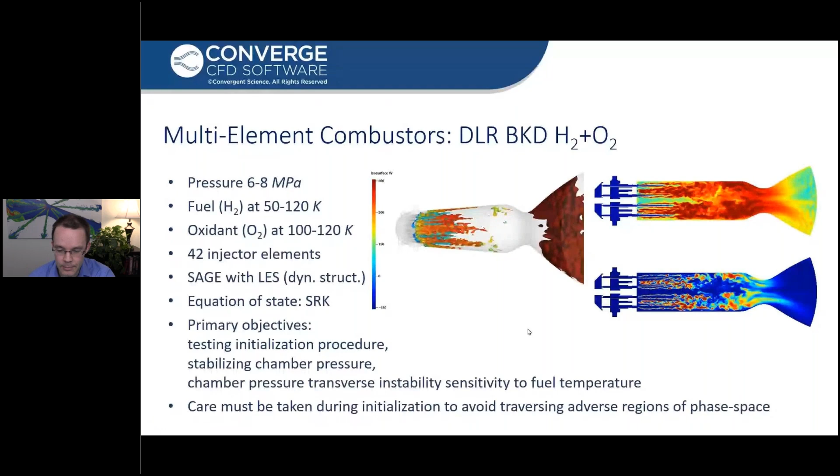Compared to our other cases, a very similar result was encountered in terms of how long it took the simulation to reach stable pressure. Secondly, we looked to see that the main chamber pressure was predicted with reasonable accuracy, and in this case a chamber pressure of about 8 megapascal was achieved. The same AMR strategy was leveraged to efficiently balance cost and accuracy.

Now, at the very end of the demonstration on the use of CONVERGE applied to some different liquid rocket combustor cases, we'll show very briefly how the workflow looks for getting a simulation of a practical geometry up and running in an efficient amount of time. This is one of the great capabilities offered by CONVERGE that's useful for practical applications.

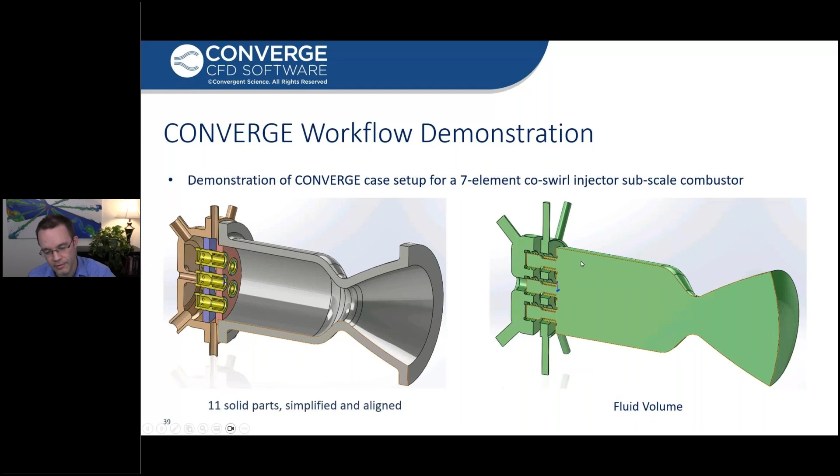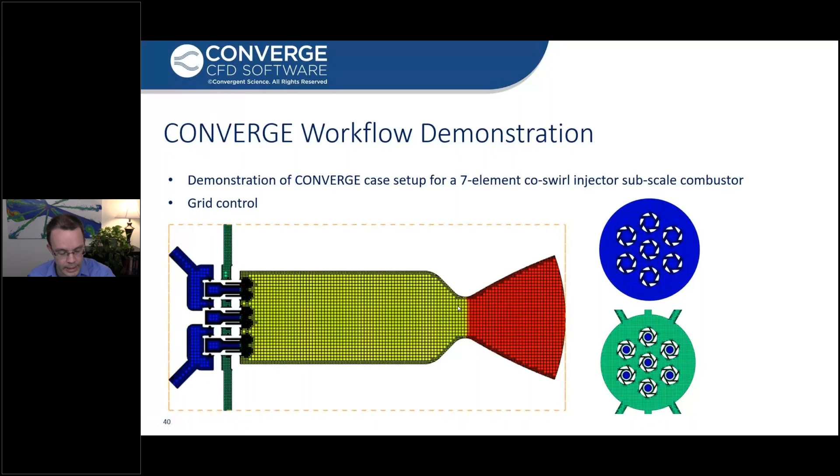In this case, we have a simplified and aligned model for 11 solid parts, including 7 swirl elements. We form the fluid volume simply by uniting those, and those all come into CONVERGE as the input, adding the grid control with a combination of fixed embedding, in other words, mesh resolution based on predefined areas, usually a result of the geometry itself, as well as adaptive mesh refinement for resolution of both the mixing and the reaction.

The chief outputs of pressure and the related heat release rate are examined to see that these reach a steady state within a reasonable time. The user does need to be somewhat cautious of how the simulation evolves over time so that no unfavorable regions of the phase space are accessed throughout those transients.

Now, we focused most of this talk, and we're just about done here, on the calculation of the internal combustion flow within the liquid rocket combustor itself. However, there's a lot of very similar, what we call adjacent application areas where CONVERGE offers a lot of advantage.

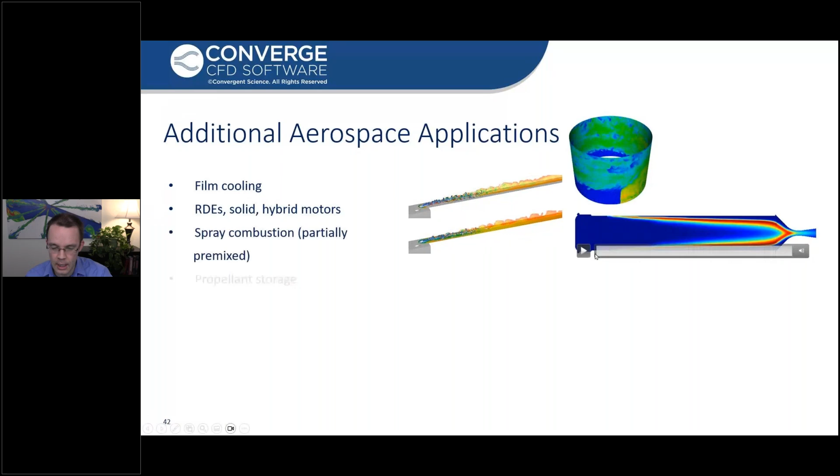The first is film cooling, shown over here. Additionally, RDEs and other types of motors, shown over here. Propellant storage is a great application for CONVERGE, whether you're doing a fluid structure interaction problem for flexible bladders, or whether you're doing the tank leakage itself. Valves involving fluid structure interaction are a great application for CONVERGE due to its ability to manipulate the mesh.

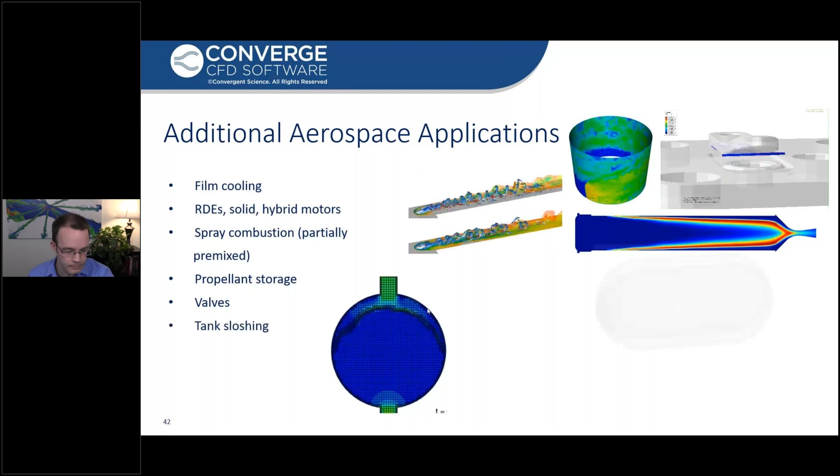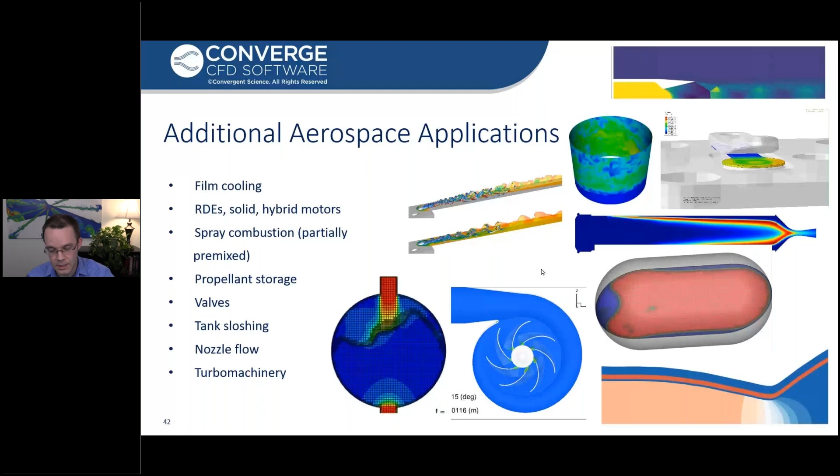And to have that adjust itself throughout the simulation in a reasonable time. Tank sloshing type simulations utilize CONVERGE's adaptive mesh refinement to preferentially refine along the interface. Nozzle flow, in order to consider the high density gradients across the shock and to use adaptive mesh refinement to resolve those efficiently. And lastly, turbo machinery, for example, this cavitating LOX turbo pump used in a liquid rocket combustor oxidizer line. External aero, another good application for CONVERGE involving the inlaid mesh together with adaptive mesh refinement.

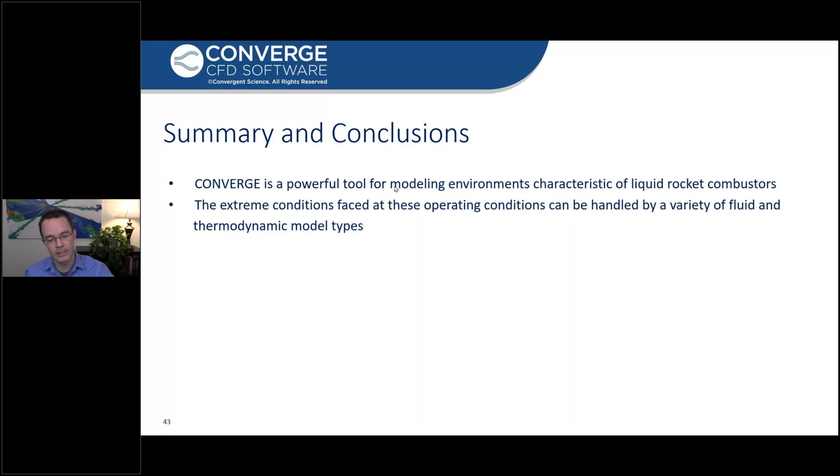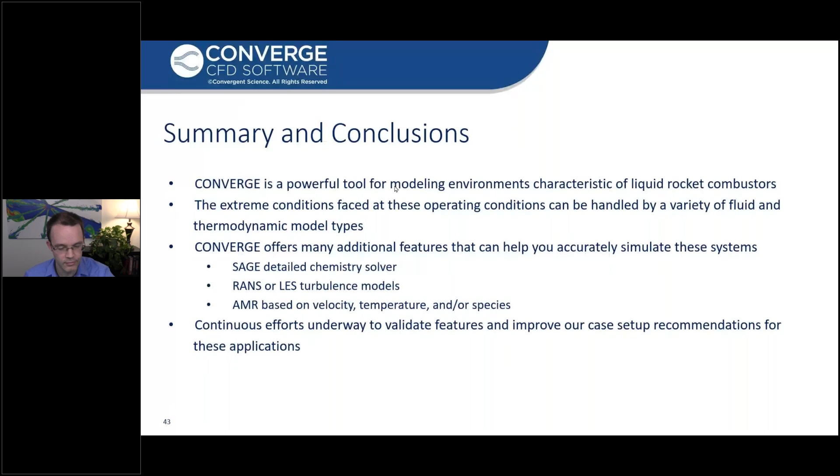So in summary, we've reached the end of our hour here. I hope everyone enjoyed the presentation and got some sense of what different models are capable of in CONVERGE for modeling the different stages of the extreme environments encountered in liquid rocket engines. I hope you got some sense of all the features offered by CONVERGE and how they could benefit your work. There is continuous effort underway to further validate and improve the features offered by CONVERGE, and there are many new models currently in development to be employed in this area.